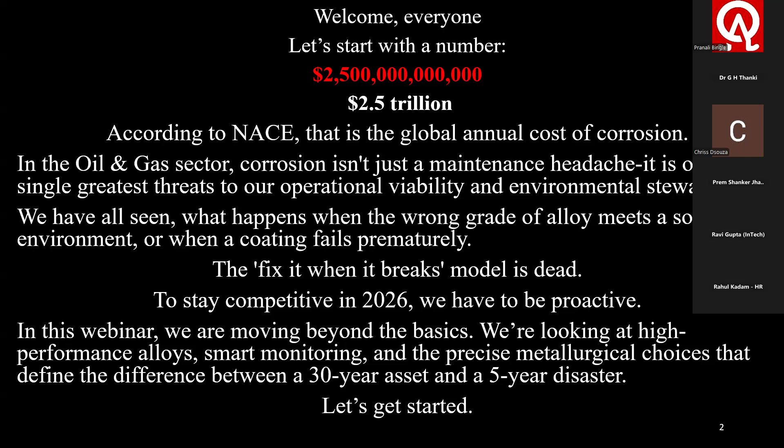Let us get started. You are the guardians of the infrastructure. By the end of the session, you will have a specific new strategy or piece of knowledge to apply to your current projects. Corrosion is not just a technical failure, it is a financial leak. Every millimeter of wall loss we prevent is a direct contribution to the company's bottom line and our ESG commitments.

As we push into more sour and ultra deep environments, the margin for error in our material selection has shrunk to near zero. We are no longer just choosing metals, we are engineering survival. We have all seen a stress corrosion crack that looked like a lightning bolt through a pipe.

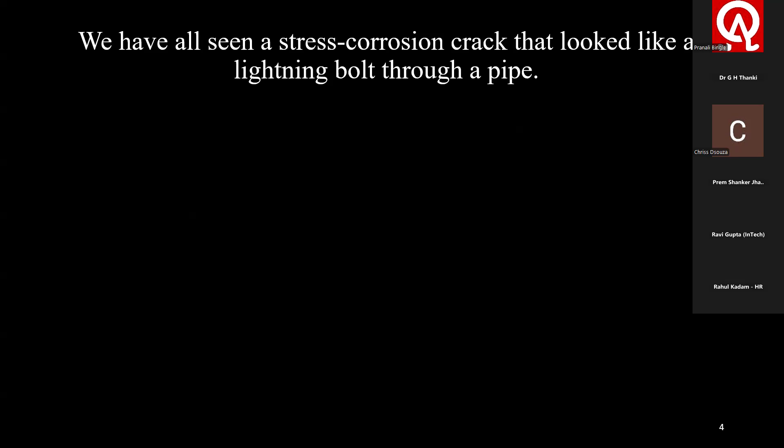Let us go through a few slides which will make things a little easier as I move forward with various slides which I am going to share with you. For example, this one - you have seen this stress corrosion crack on a pipe. Very disastrous path. Okay, next one is showing the corrosion, showing the tension and magnified details.

This is a micro crack like this - microscopic piece becoming a stress concentration. You see, the picture tells me a lot. Tensile stress - you can see localized corrosion pits under tensile stress. Leakage starts. In the magnified form, it shows the corrosion pits and micro cracks.

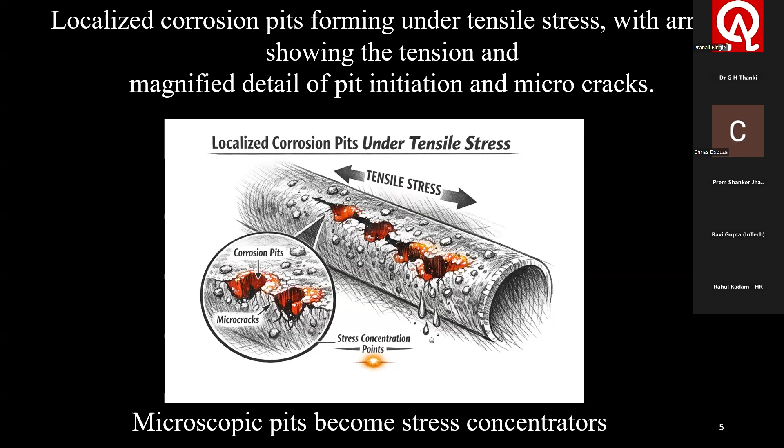These are step-by-step pictures I'm showing you how dangerous this corrosion can become in our oil and gas industries. Crack propagation, the fishbone pattern. Left-hand side shows the main crack, branching cracks, and spreading like a lightning bolt. This advanced one has to be good.

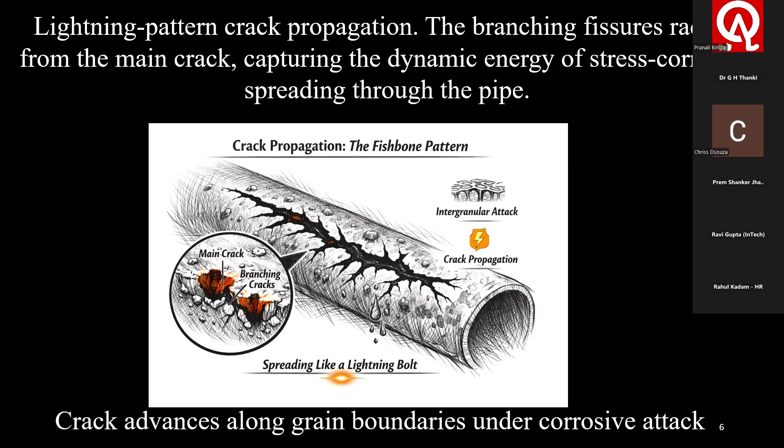And these arrows clearly mark the intergranular attack zones where corrosion follows grain boundaries. The inset magnified view reveals the crystalline fracture path, making the atomic level damage visual. You can see the crystalline path of corrosion.

This particular slide speaks volumes about how it happens. The fractography reveals the signature of stress corrosion cracking. I'm just touching one important point - this happens in a big way when sulfur is present in the oil.

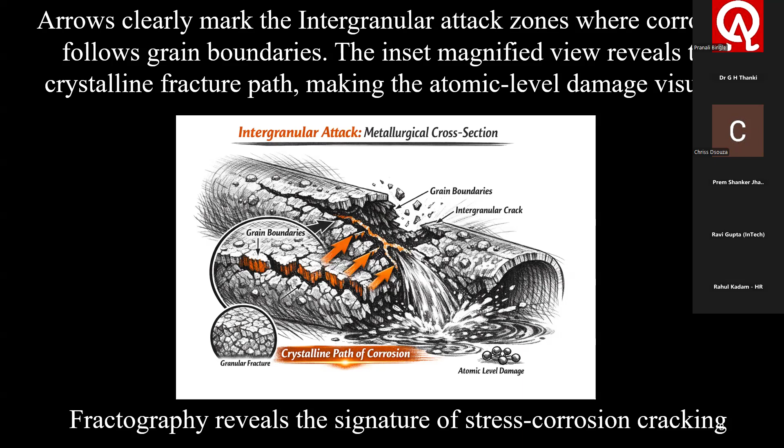This is a message which I want to pass through this webinar to all your people, those who are interested to learn and practice in their own day-to-day life. The sequence now tells us a complete forensic and motivational story, from pit initiation to rupture, culminating in vigilance as the ultimate protection.

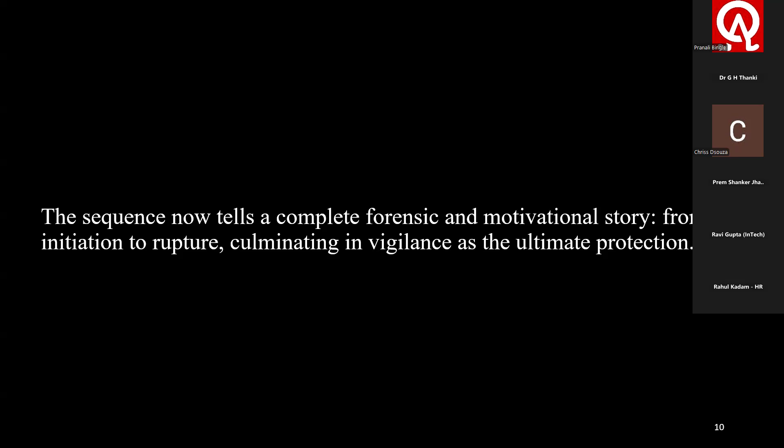Those are not just failures, they are signatures of a metallurgical mismatch. Today, we learn how to read these signatures before they write a check we can't cash.

In the oil and gas industries, corrosion is not merely a maintenance challenge, it is a critical safety, economic, and environmental concern. Managing it requires a sophisticated understanding of metallurgy, environmental chemistry, and material science. So I try to club all three together - metallurgy, environmental chemistry, and material science. A single one cannot give you the total foundation to control corrosion.

The industry's approach to corrosion mitigation relies on a hierarchy of defenses: material selection, that is metallurgy; environmental modification through inhibitors, water treatment; and surface protection - coatings and cathodic protection. First, the core corrosion mechanism - let us understand that. Before selecting materials, engineers must characterize the threat environment. The presence of water is the catalyst for nearly all corrosion in oil and gas.

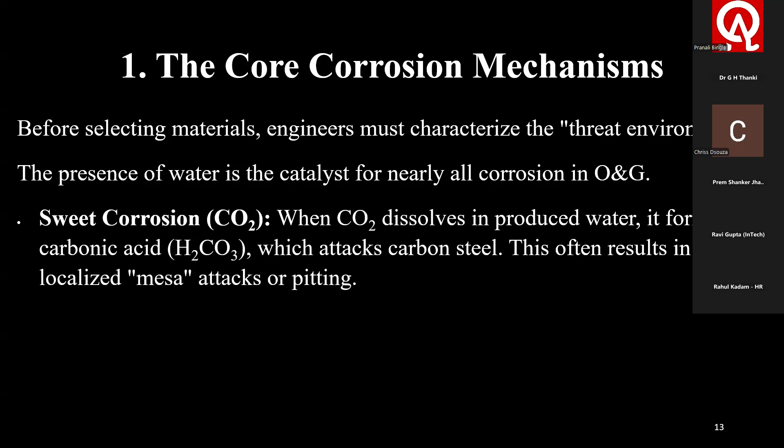Sweet corrosion means CO2, carbon dioxide, dissolves in produced water and forms carbonic acid, known as H2CO3, which attacks carbon steel. This often results in localized mesa attacks or pitting. This is the reaction that takes place.

Sour gas H2S, hydrogen sulfide, is highly toxic and leads to sulfide stress cracking and hydrogen induced cracking. Even trace amounts of H2S can cause sudden brittle failure in high strength steels.

Microbiologically influenced corrosion, MIC, commonly called MIC, involves sulfate reducing bacteria that thrive in stagnant zones or under deposits, producing hydrogen sulfide locally and accelerating pitting corrosion.

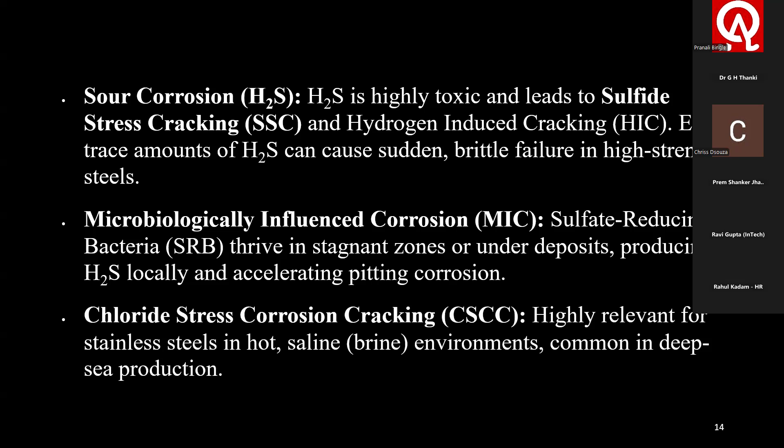Then comes chloride stress corrosion cracking, highly relevant for stainless steels in hot, saline environments, common in deep sea production. Let us see the metallurgical solution, the hierarchy of resistance.

Let us understand one by one. Material selection is a primary line of defense. Engineers choose metals based on their resistance profile versus cost and mechanical requirements of the application.

First, let us see carbon and low alloy steels, the workhorse of the industry for onshore pipelines and well casing, where the environment is non-corrosive or can be easily treated.

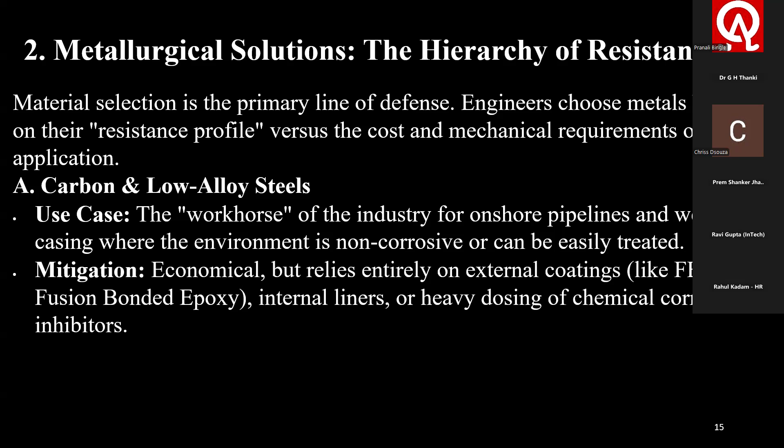How would you mitigate? Economical, but relies entirely on external coatings like fusion bonded epoxy, internal liners, or heavy dosing of chemical corrosion inhibitors. Metallurgical limitations include high susceptibility to H2S cracking. Therefore, specific...

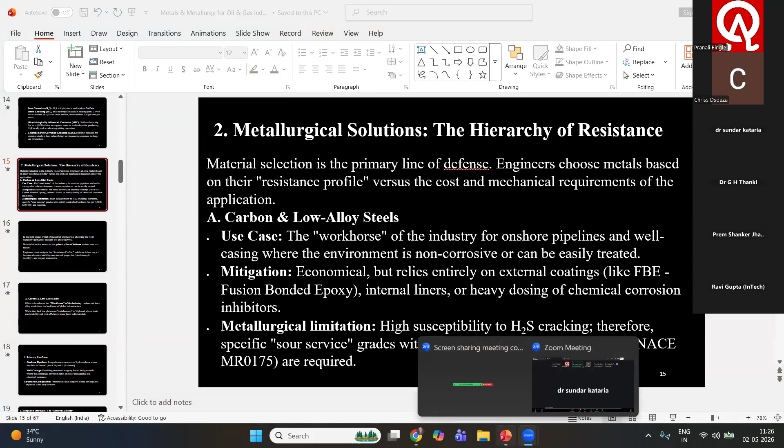Sir, your screen is not visible. What happened? Is it visible now? Okay, first let us see carbon and low alloy steels. Dr. Thanki, can you go back five minutes, because there was no audio and the slides were also not visible. If we go back to slide 17, I will go to 15 or 14. Okay, thank you.

Okay, let us go with slide number 17, carbon and low alloy steels.

Often referred to as the workhorse of industry, carbon and low alloy steels form the backbone of global infrastructure. While they lack the glamorous stainlessness of high-end alloys, their predictability and cost efficiency make them indispensable.

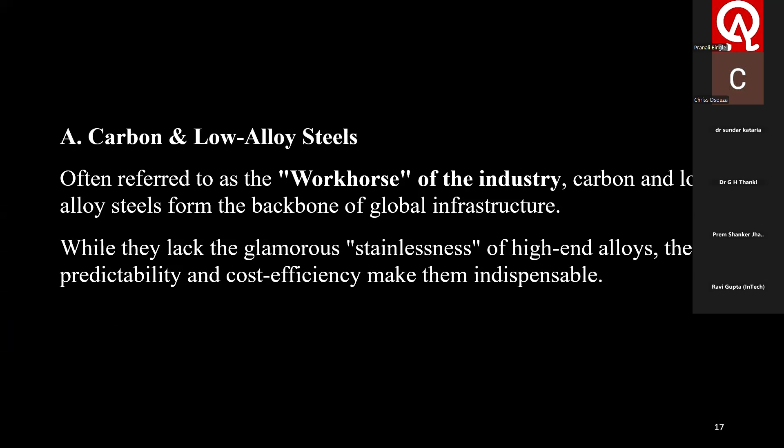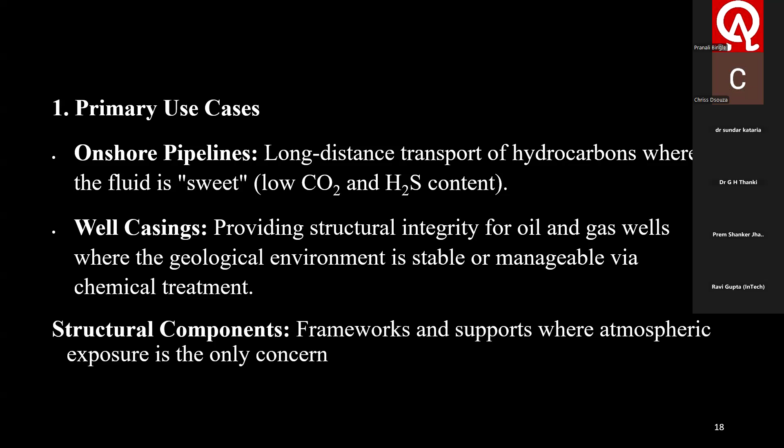Primary use cases: onshore pipelines for long-distance transport of hydrocarbons where the fluid is sweet, meaning low CO2 and H2S content; well casings providing structural integrity where the geological environment is stable or manageable via chemical treatment; and structural components, frameworks and supports where atmospheric exposure is the only concern.

So now the mitigation strategies, the external defense. Because carbon steel lacks innate corrosion resistance, it relies on a system of protection rather than its own chemistry.

External coatings, fusion bonded epoxy, act as a physical barrier. It is a thermoset polymer applied to heated pipes, creating a robust shield against soil-borne moisture and oxygen.

For internal liners, in more aggressive environments, plastic or cement liners prevent the produced fluids from touching the steel. And chemical corrosion inhibitors, CCIs, we see next.

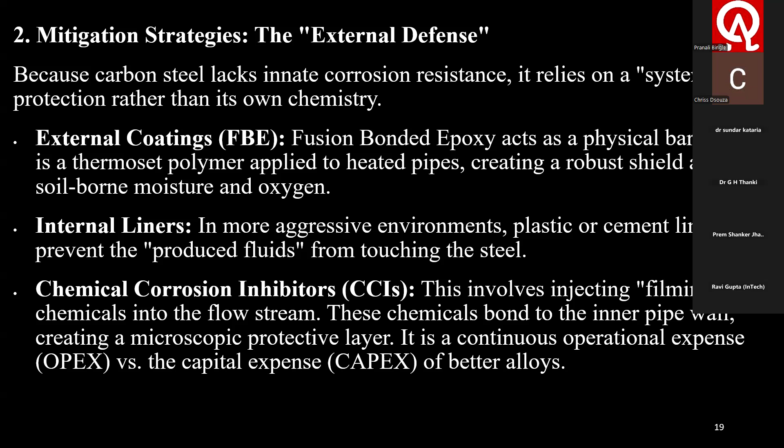This involves injecting filming chemicals into the flow stream. These chemicals bond to the inner pipe wall, creating a microscopic protective layer. It is a continuous operational expense, OPEX, versus the capital expense, CAPEX, of better alloys. There is a difference between OPEX and CAPEX.

Metallurgical limitation and sour service: the greatest weakness of standard carbon steel is its vulnerability to hydrogen sulfide, a phenomenon known as sour service. What is the chemistry of failure?

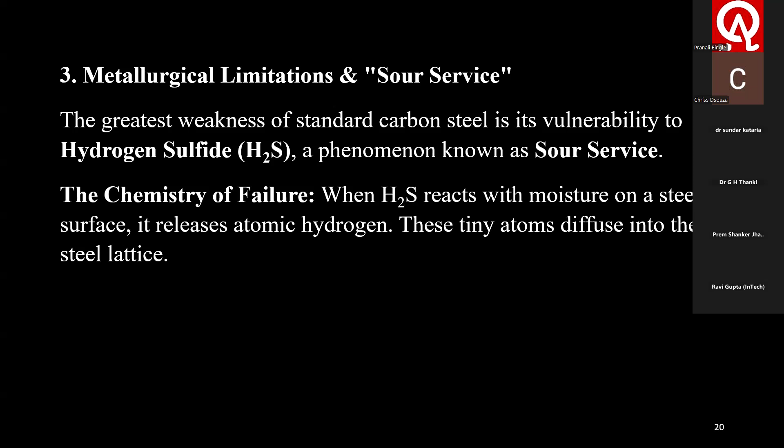When hydrogen sulfide reacts with moisture on a steel surface, it releases atomic hydrogen, and these tiny atoms diffuse into the steel lattice. If the steel is too hard or contains impurities, hydrogen collects at trap sites, creating internal pressure that leads to sulfide stress cracking or hydrogen-induced cracking, as shown here.

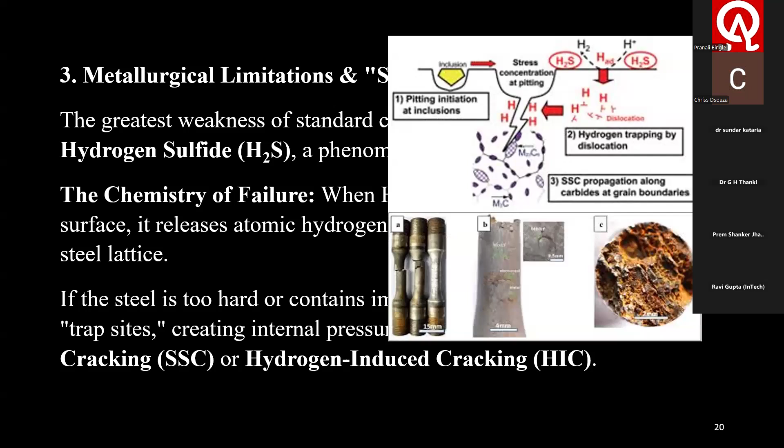Sulfide stress cracking, then comes another one, hydrogen-induced cracking. And this shows the manifestation of how it looks on the surface when hydrogen-induced cracking takes place.

To combat this, engineers utilize specialized sour service grades governed by the NACE MR0175 or ISO 15156 standards. Hardness control is generally limited to 22 HRC, meaning Rockwell hardness C. Harder steels are more brittle and prone to cracking under hydrogen embrittlement.

Cleanliness involves reducing sulfur and phosphorus levels during the melting process to eliminate inclusion sites where hydrogen bubbles can form. Heat treatment requires precise quenching and tempering to ensure a uniform microstructure, typically fine-grained tempered martensite or ferrite pearlite.

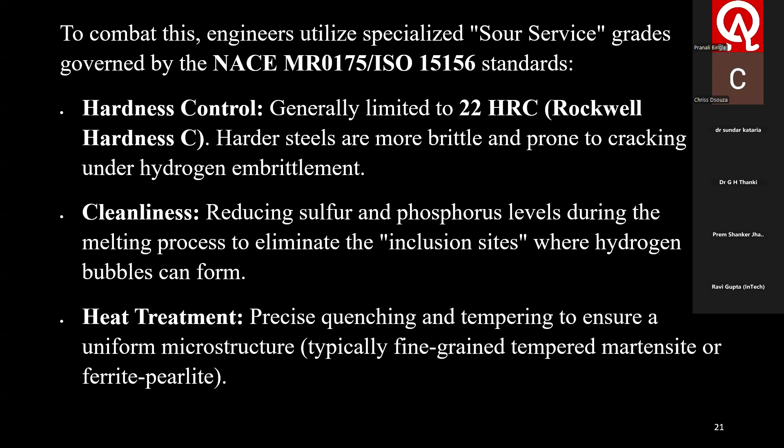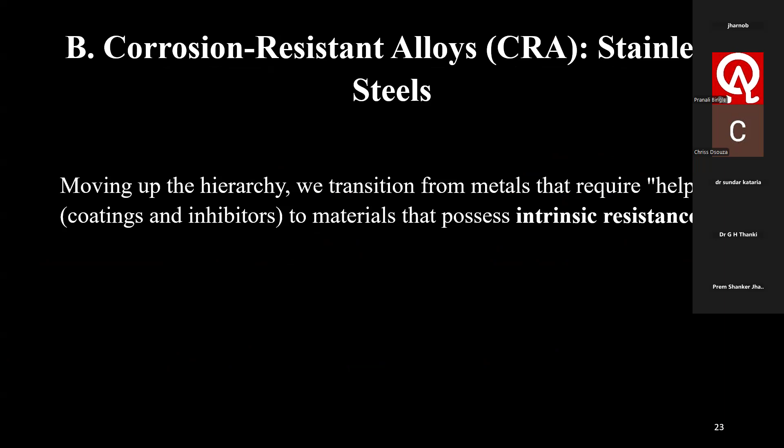Corrosion-resistant alloys, stainless steel. Moving up the hierarchy, we transition from metals that require help, meaning coatings and inhibitors, to materials that possess intrinsic resistance. Stainless steels are defined by a minimum chromium content of 10.5%, which reacts with oxygen to form a self-healing microscopic passive layer of chromium oxide.

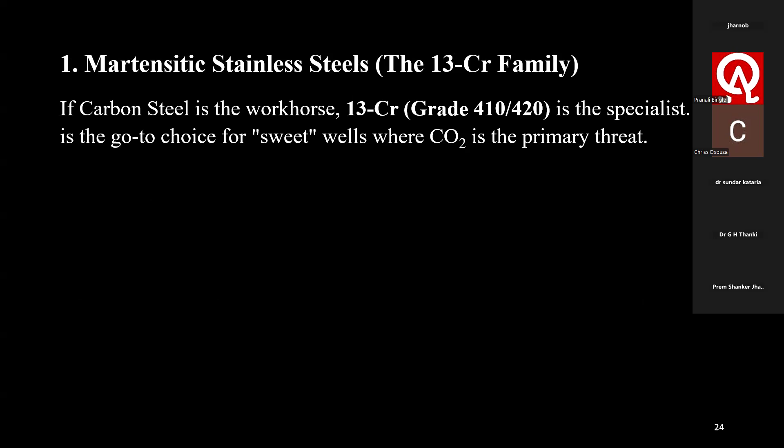Martensitic stainless steel, that is the 13 CR family. If carbon steel is the workhorse, 13 chrome is the specialist. It is the go-to choice for sweet wells where CO2 is the primary threat. The advantage: high strength to weight ratio and excellent resistance to carbon dioxide corrosion without the need for continuous chemical inhibition. The trade-off: poor weldability.

These are typically used for downhole tubulars, meaning production tubing, rather than long distance welded pipelines. What are the limitations? Highly sensitive to chlorides and high temperatures. In hot, salty environments, the passive layer breaks down, leading to rapid pitting.

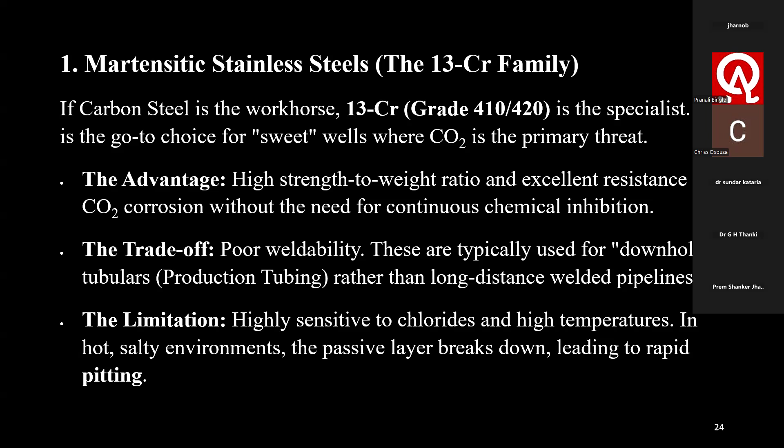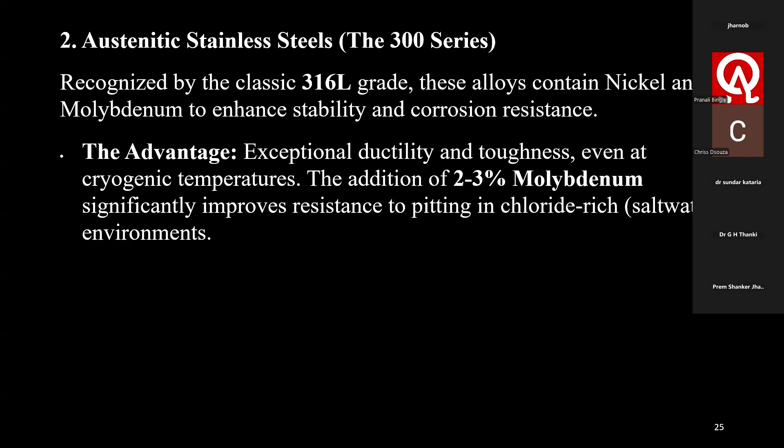Next is the austenitic stainless steel, very fondly known as the 300 series, recognized by the classic 316L grade. These alloys contain nickel and molybdenum to enhance stability and corrosion resistance. The advantage: exceptional ductility and toughness, even at cryogenic temperatures. The addition of 2 to 3% molybdenum significantly improves resistance to pitting in chloride-rich, meaning saltwater, environments.

But what is the critical weakness? Chloride stress corrosion cracking. In hot, chloride-rich environments, these steels can fail catastrophically and suddenly through fine branching cracks, even if the metal looks shiny and new on the surface.

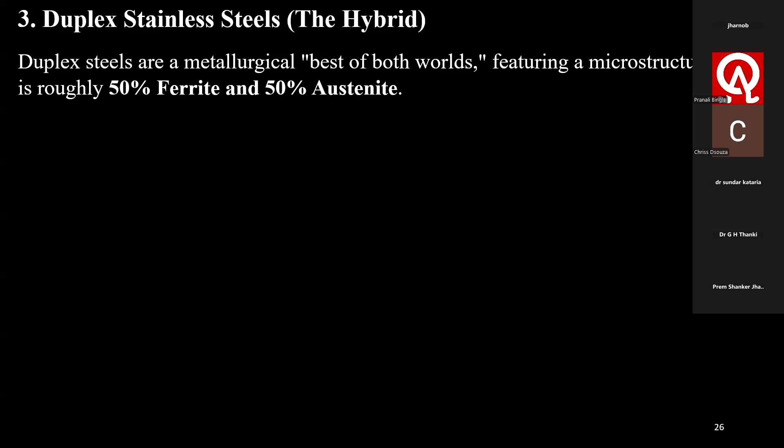Next comes the duplex stainless steel, which we call a hybrid. Duplex steels are a metallurgical best of both worlds, featuring a microstructure that is roughly 50% ferrite and 50% austenite. Mechanical superiority: roughly twice the yield strength of standard austenitic steels, allowing thinner walls and lighter structures. That means, from the cost point of view, it also wins the race.

Its corrosion profile is what? Exceptional resistance to stress corrosion cracking and pitting. They are the standard for subsea manifolds and flow lines where the internal fluid is aggressive and the external environment is seawater. The PREN number.

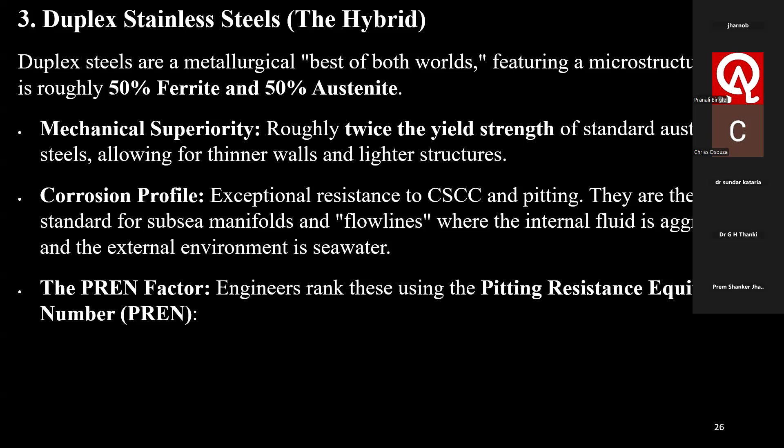Engineers rank these using the pitting resistance equivalent number, PREN. This is what you call pitting resistance equivalent: percentage chromium plus 3.3 times molybdenum percentage and tungsten percentage, plus 16 times nitrogen. If you calculate this and the PREN number comes out, let's pick some values, say 30, 40, 45, like that.

We'll see in the following lecture. A PREN of more than 40 classifies a material as super duplex, capable of surviving the most punishing marine conditions.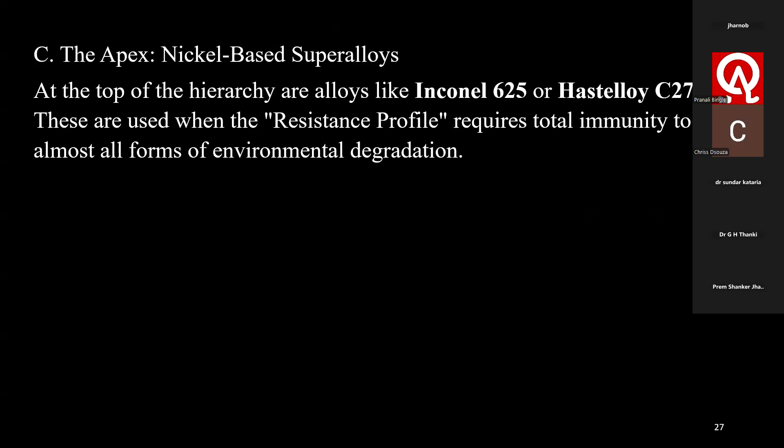The apex: nickel-based superalloys. At the top of the hierarchy are alloys like Inconel 625 or Hastelloy C276. These are used when the resistance profile requires total immunity to almost all forms of environmental degradation. Use case: high pressure, high temperature, HPHT wells, or components handling acid gases, high H2S, and carbon dioxide.

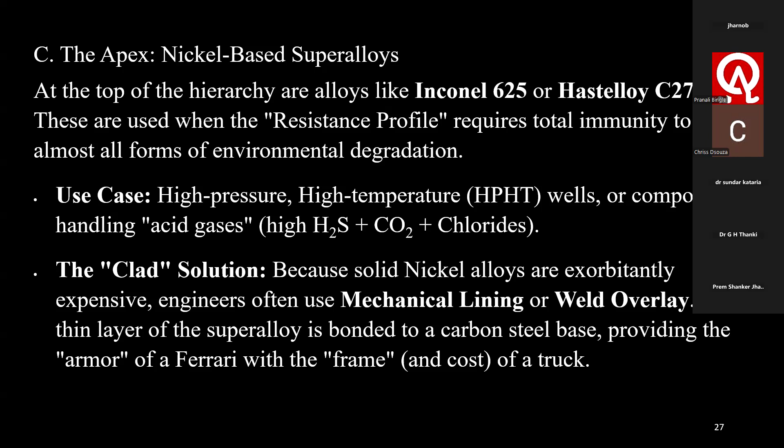The clad solution: because solid nickel alloys are exorbitantly expensive, engineers often use mechanical lining or weld overlay. A thin layer of the superalloy is bonded to a carbon steel base, providing the armor of a Ferrari with the frame of a truck. I hope you understand this better now.

Let us see a comparison of cost performance. For carbon steel, if you take the cost multiplier as 1, for example, key threats are none, it needs help. Common applications are onshore trunk lines.

13 chromium stainless steel is 3 to 5 times costlier than carbon steel. Its key threat is carbon dioxide, sweet gas, and the main application is downhole tubing.

Duplex stainless steel is 8 to 12 times costlier than carbon steel. Its threat is chloride and high stress, which it will resist much more, and its common application is the subsea flowline.

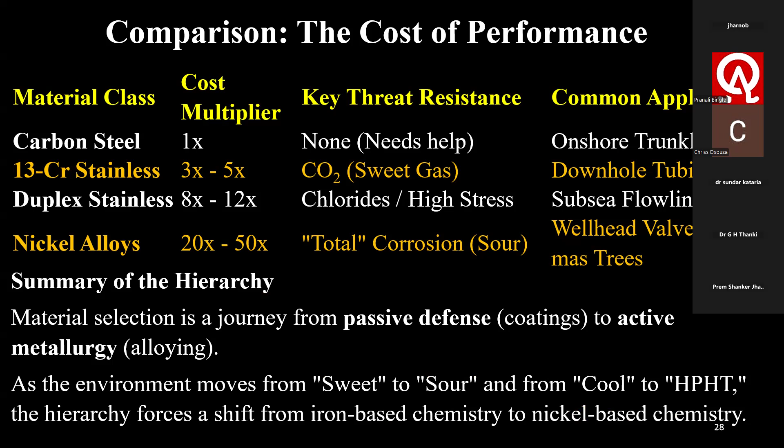Summary of the hierarchy: materials selection is a journey from passive defense, that is coatings, to active metallurgy, that is alloying. As the environment moves from sweet to sour and from cool to HPHT, the hierarchy progresses from carbon steel to duplex to nickel-based chemistry.

Corrosion resistant alloys, CRA. When the fluid is too aggressive, with high partial pressure carbon dioxide or H2S beyond what carbon steel can handle, we move to CRA. These alloys rely on a thin passive chromium oxide layer to stop corrosion.

This is just a brief overview I'm giving you. Materials include stainless steel, austenitic stainless steel, duplex, and super duplex. Let me show you the typical composition. Key characteristics: high strength, ductile, austenitic, with superior pitting resistance in the super duplex. The common application is wellhead to aggressive subsea production where super duplex is used.

Please have a look at this particular table. I will pause for a minute.

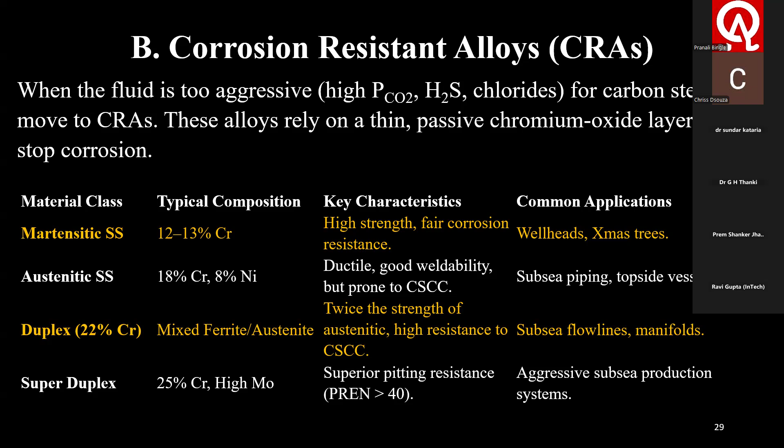Let us go ahead to high performance nickel alloys and titanium, for the most extreme HPHT, high pressure, high temperature, deepwater, or deep gas wells. Here I am talking about Inconel 625 and alloy 825. This provides immunity to almost all forms of localized corrosion and cracking. They are used for the most critical downhole completion components where failure would be catastrophic and impossible to repair.

Titanium alloys have exceptional strength to weight ratio. They are very much known for that strength to weight ratio. Along with immunity to corrosion stress cracking, titanium is used increasingly in offshore riser systems and subsea components to reduce structural weight.

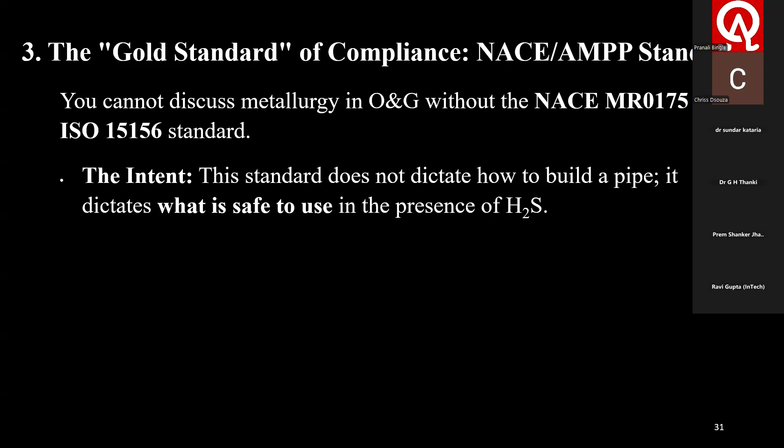Let us see the gold standard of compliance as per the NACE and AMPP standards. You cannot discuss metallurgy in oil and gas without the NACE MR0175 / ISO 15156 standard. What is the intent? This standard does not dictate how to build a pipe, it dictates what is safe to use in the presence of H2S. I think this intent is clear.

What is the mechanism? It defines limits for the hardness, usually measured in HRC, Rockwell C, of the metal. If a steel is too hard, it is susceptible to hydrogen embrittlement, as we know well. Engineers must ensure every weld, heat-affected zone, and base metal component complies with the hardness limits specified for the operating environment. It's a very important mechanism to be known to meet this intent.

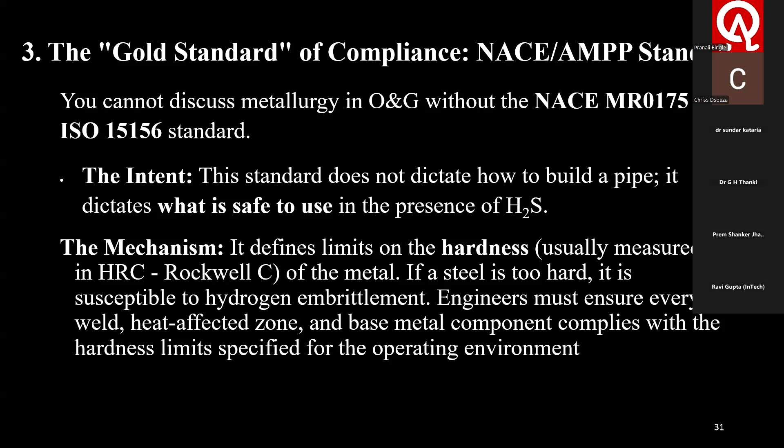Now let us discuss the holistic mitigation strategy. Metallurgy is only one part of the equation. A mature corrosion management program uses a multi-layer defense. My dear participants, forgive me, I'm not dealing only with metallurgy now, because if I talk only of metallurgy, the equation will never be over. I must have support from other corrosion management layers for the defense. Let us go into detail to form a holistic picture.

Chemical inhibition: continuous injection of film-forming amines for carbon steel pipelines. These chemicals adsorb onto the metal surface, creating a hydrophobic barrier that prevents the corrosive water phase from touching the steel.

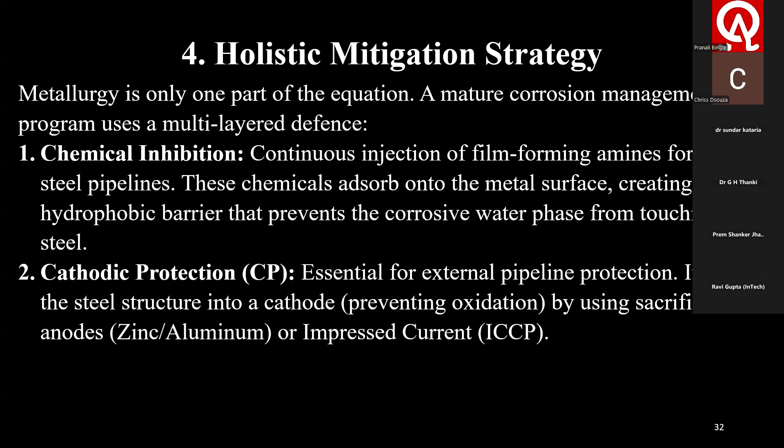Second comes cathodic protection, essential for external pipeline protection. It turns the steel structure into a cathode, preventing oxidation by using sacrificial anodes like zinc and aluminum, or impressed current cathodic protection, ICCP.

Water treatment: removing oxygen, the primary accelerator of corrosion, via vacuum deaerators or chemical oxygen scavengers before water is pumped into injection wells. These three points are to be kept in mind to understand the holistic mitigation strategy.

Designing for the oil and gas industry requires balancing the total cost of ownership, capital expenditure on expensive alloys, versus operating expenditure on corrosion inhibitors and inspection, against the risk of failure.

I would like to repeat the same paragraph, keep it in your mind: designing for the oil and gas industry requires balancing the total cost of ownership against the risk of failure.

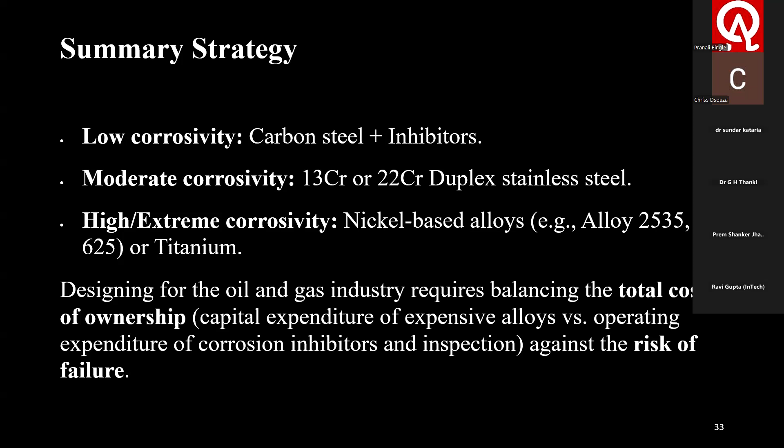Material selection for high pressure, high temperature subsea environments. In HPHT subsea environments, the corrosion landscape shifts from standard kinetics to a regime dominated by aggressive synergisms. When temperature exceeds 150 degrees centigrade and pressure rises significantly, traditional material boundaries collapse, requiring a transition from standard stainless steel to advanced nickel-based superalloys.

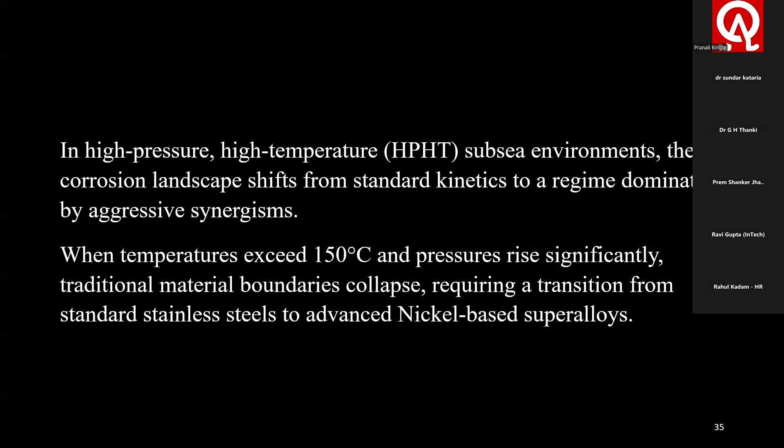Metallurgy in HPHT subsea environments. The core challenge in HPHT is that high thermal energy accelerates cathodic and anodic reaction rates, while high pressure increases the solubility of gases like carbon dioxide and hydrogen sulfide, directly impacting the partial pressure and the resulting corrosivity.

Now let us see the synergy of failure mechanisms. At temperatures more than 120 degrees centigrade, common alloys like 13 chrome or 22 chrome to duplex face a threshold where the passive chromium oxide layer becomes prone to breakdown in the presence of chlorides.

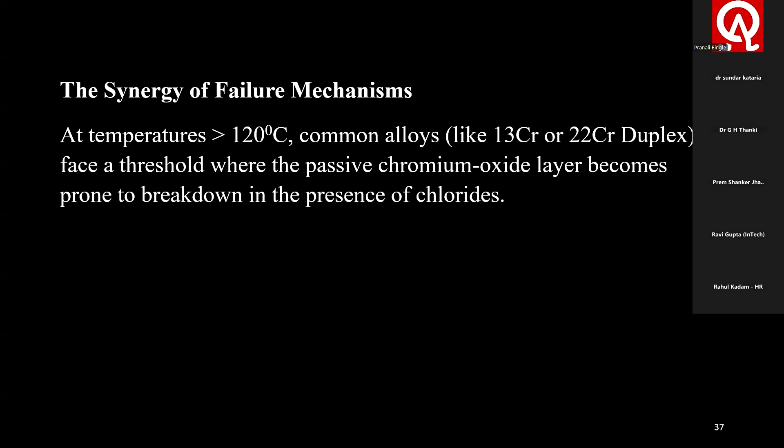Here let us see HE and SCC. In sour HPHT environments, the kinetics of hydrogen evolution and diffusion into the metal lattice increase exponentially. The temperature sensitivity of CRAs, 13 chromium and super 13 chromium, often limits them to lower temperatures due to the risk of sulfide stress cracking and chloride-induced pitting.

22 chromium to 25 chromium duplex is prone to phase instability, that means formation of brittle sigma phases if not strictly controlled during welding and heat treatment, which exacerbates corrosion in HPHT services.

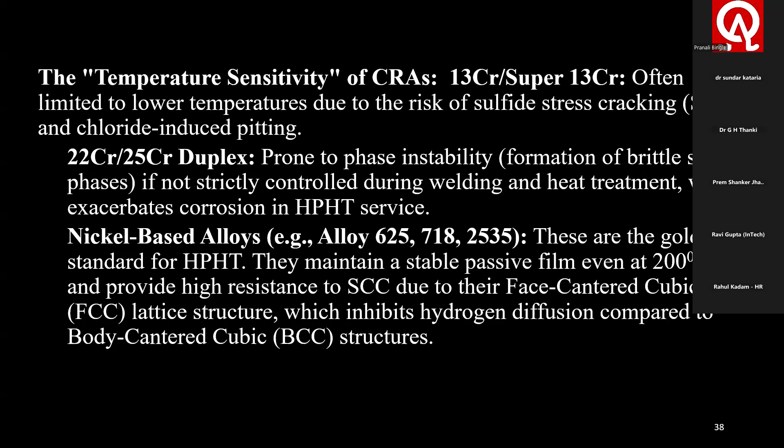If you talk about nickel-based alloys, say 625, 718, and 2535, these are the gold standard for HPHT. They maintain a stable passive film even at 200 degrees centigrade plus and provide higher resistance to stress corrosion cracking due to their face-centered cubic lattice structure, which inhibits hydrogen diffusion compared to body-centered cubic structure.

Now let us select the protocol. When specifying materials for HPHT, the focus must shift to pitting resistance equivalent number, that is PREN, and the critical pitting temperature, CPT. For subsea conditions, one must calculate the alloy resistance based on the specific chloride concentration and partial pressure of sour gases.

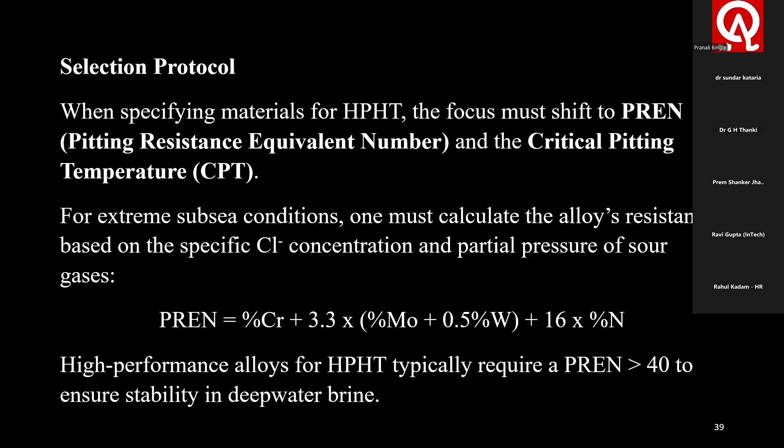I am again referring back to that PREN equation. High performance alloys for HPHT typically require a PREN more than 40 to ensure stability in deep water brine.

Let us see the chemistry of corrosion inhibitor selection. Corrosion inhibitors in the oil field are essentially surfactants that modify the metal-liquid interface. Selecting the correct chemical for an HPHT environment is a balancing act between thermal stability and the ability to form a persistent hydrophobic barrier that does not allow water to touch the substrate.

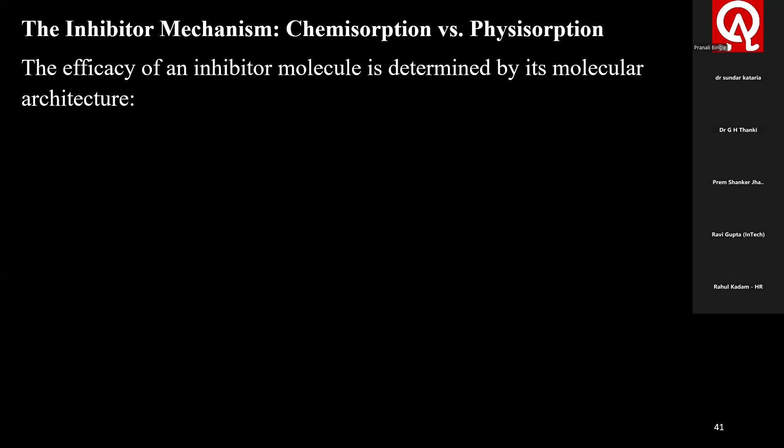The inhibitor mechanism—chemisorption versus physisorption. The efficacy of an inhibitor molecule is determined by its molecular architecture. The polar head group, typically an amine, pyridine, or phosphonate group, anchors the molecule to the metal surface. Chemisorption provides a stronger, more durable bond by sharing electrons between the head group and the metal, which is essential for HPHT environments where thermal energy would otherwise strip the inhibitor from the surface.

This would render the inhibitor ineffective. The hydrophobic tail, a hydrocarbon chain usually C12 to C18, extends into the fluid phase and creates a hydrophobic wall, preventing the corrosive aqueous phase of H2O, CO2, and chloride from reaching the metal surface.

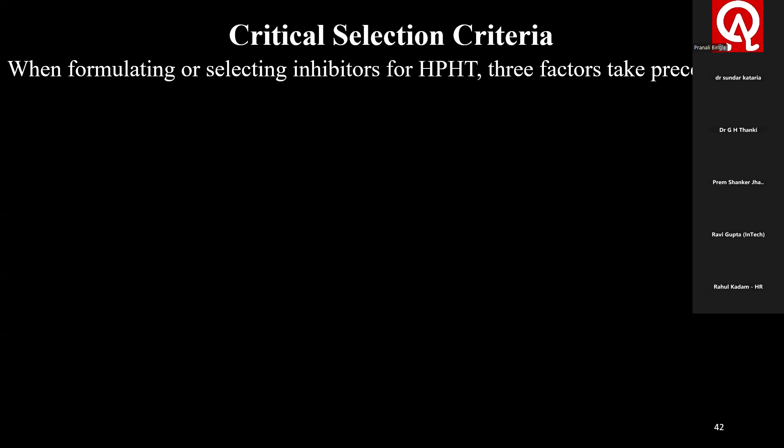Now let us see the critical selection criteria. When formulating or selecting inhibitors for HPHT, three factors take precedence. First, thermal degradation: many long chain amines or imidazolines degrade at high temperatures, breaking the bond between the head and the tail. Formulators must utilize thermally stable heterocyclic structures or specialized synergistic blends that maintain integrity above 150 degrees centigrade.

Second comes the partitioning coefficient. An inhibitor must partition preferentially into the oil phase if oil soluble, or the water phase if water soluble, depending on the production flow. In high water cut wells, water soluble, film-forming amines are required.

Last is emulsion tendency. One must evaluate the oil-water separation capability. An effective inhibitor must not create tight emulsions, meaning stable rag layers in separators, which would otherwise cause massive downstream processing issues.

So these are the critical areas in the selection. I have given the heading as critical selection criteria: thermal degradation, partitioning coefficient, and emulsion tendency. I hope you will appreciate this matter.

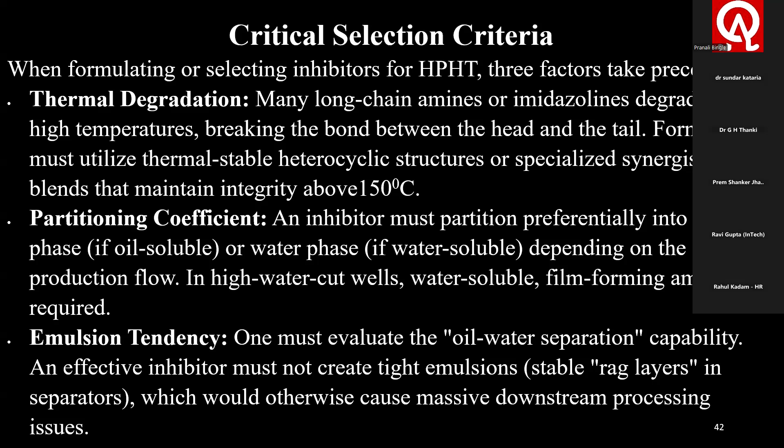Optimization for deep water. For long distance subsea tie-backs, the challenge is film persistence. The inhibitor is often injected at the wellhead and must remain active over kilometers of flow line. It's a really big challenge, and I would love to repeat it again.

For long distance subsea tie-backs, the challenge is film persistence. The inhibitor is often injected at the wellhead and must remain active over kilometers of flow line. We look for batch treatment capabilities, where the inhibitor can form a tenacious, durable film that survives long after the chemical injection has ceased or fluctuated. It's a really big challenge, sir—that's the batch treatment I'm talking about.

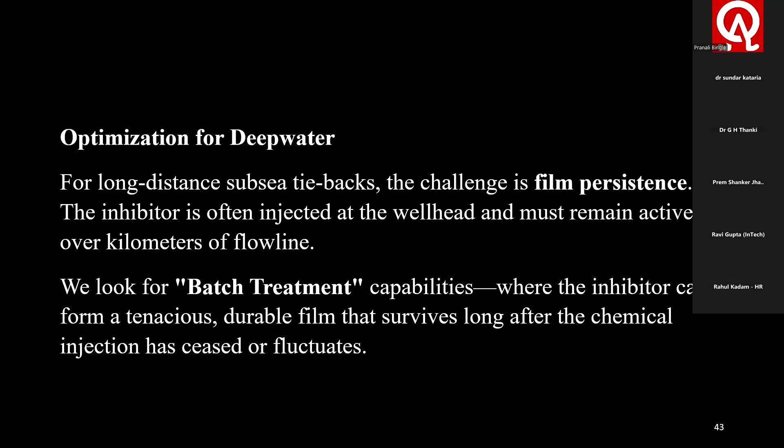Strategic corrosion management integrates metallurgy, life cycle cost, and safety. To optimize asset performance in HPHT environments, one must move beyond mere material selection and adopt a holistic life cycle costing and inherently safer design framework.

Inherently safer design, ISD, is a really very interesting study. If interested, I can give an independent talk on inherently safer design and life cycle costing to more people, maybe for 1.5 hours or so. If required, I'll be available to you.

The following synthesis aligns metallurgical performance with economic and safety realities, specifically tailored for capital projects within the Indian industrial landscape.

The economic link: metallurgy, LCC, and ROI. In the Indian market, project stakeholders often prioritize initial capex. However, for HPHT assets, the corrosion warrior approach demonstrates that investing in higher grade metallurgy, CRA, often results in superior net present value (NPV) and return on investment (ROI) when OPEX, that means operation expenditure such as chemical injection, monitoring, and inspection, is factored in over 15 plus years.

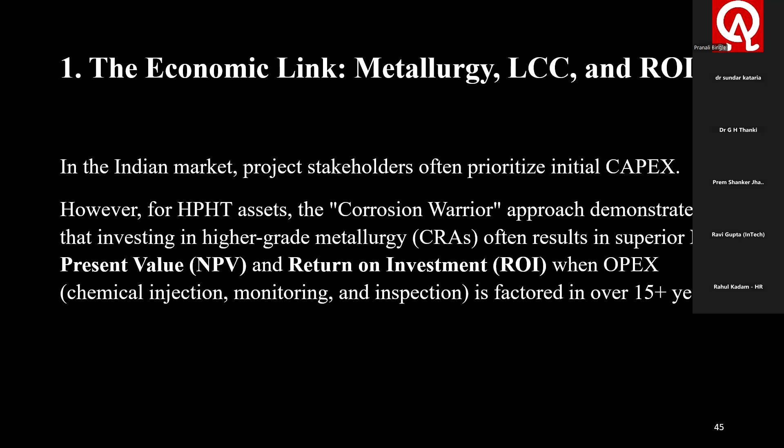Duplex stainless steel is moderate, 1.8 times cost. OPEX is low with minimum dosing. Life cycle risk is low. A standard choice for offshore and subsea applications.

Safety integration: inherently safer design. In corrosion management, ISD dictates that we eliminate the hazard at the design stage rather than relying on active control systems like chemical inhibitors, which can fail.

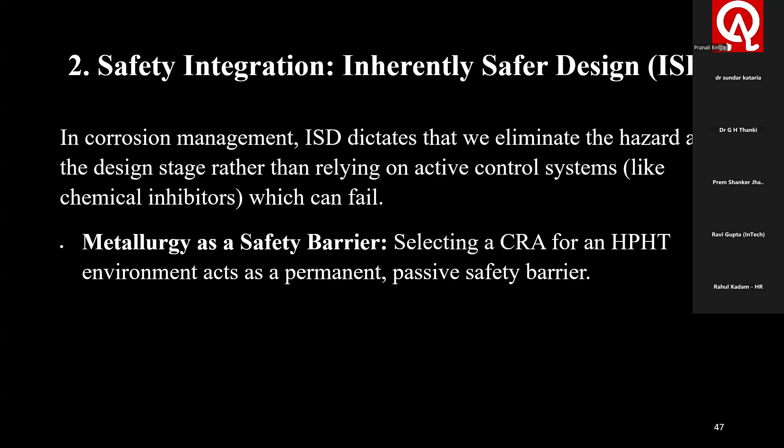Metallurgy is a safety barrier. Selecting a CRA for the HPHT environment acts as a permanent passive safety barrier. It eliminates the human factor, the risk of chemical pump failure, inhibitor shortage, or improper dosing concentration, which are common failure points in our Indian industrial operations.

With a little sorrow, I tell you, from my own set of experiences, inhibitor dosage or inhibitor shortage had caused big problems in some industries where the human factor had entered in. Now, I will not dwell on the human factor - being human, we know our negative points in our mind.

Corrosion related containment loss. Under the principle of ISD, we minimize the frequency of inspection and the complexity of corrosion monitoring infrastructure by using materials that resist cracking by design.

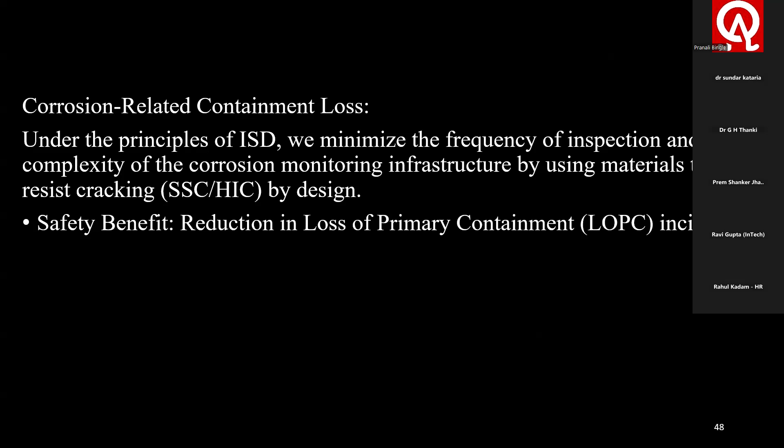Safety benefit: reduction in loss of primary containment (LOPC) incidents. The regulatory environment ensures strict adherence to NACE MR 0175 and ISO 15156, providing a defensible engineering position in safety audits.

Let us see the tangible benefits and ROI drivers. When presenting these strategies to management, focus on the following tangible metrics if you want to get through and get the green signal. These are internal matters to discuss among engineers before they reach the board.

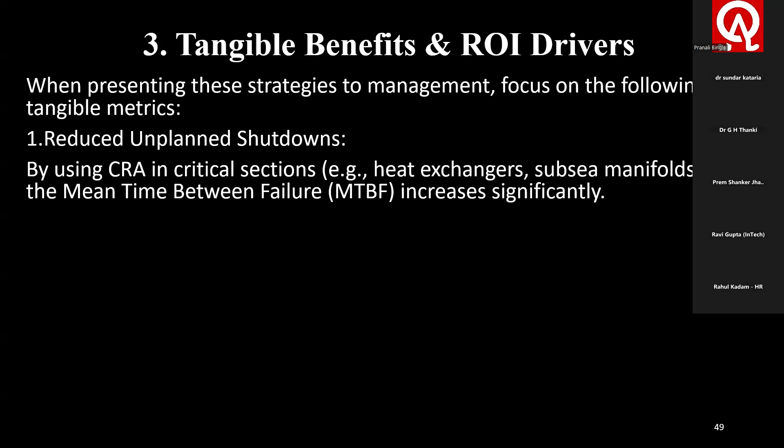Reduce unplanned shutdowns by using CRA in critical sections like heat exchangers, subsea manifolds. The mean time between failure, MTBF - a buzzword now for maintenance engineers - increases significantly. Benefit: avoiding just one unscheduled shutdown in an Indian refinery or chemical plant can save tens of crores in lost production.

Lower insurance premium. Asset integrity management, which is my buzzword now - since last few years I'm working only with asset integrity management programs - demonstrates that the use of high-grade, risk-adjusted materials often qualifies for a better insurance risk profile, so you pay a little less premium. In the long run, this driver will help you reach the board of directors to get the sanction.

Decrease inspection frequency. High integrity alloys require less frequent non-destructive testing and intelligent pigging, reducing OPEX related to specialized inspection, labor, and logistics.

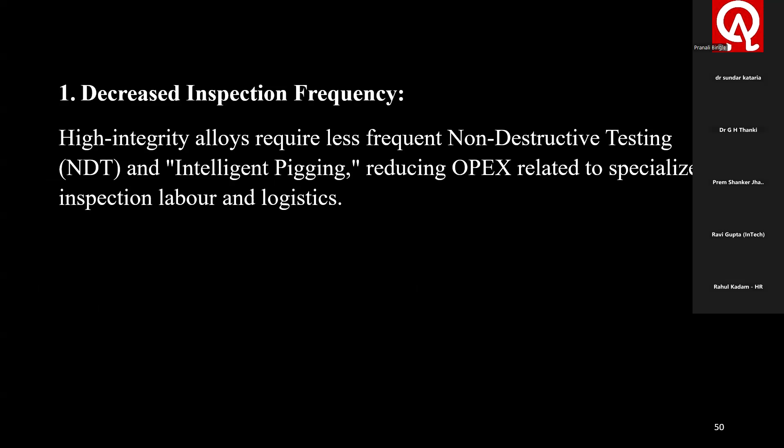Environmental compliance: minimizing chemical inhibitor usage reduces the toxic load in the produced water stream, lowering the capital and operating costs of the effluent treatment plant.

I am going to throw one webinar on effluent treatment plants soon. Corrosion plays an important role there. I'll make a note so that when it goes on air, this case will be covered - we have to wait for that.

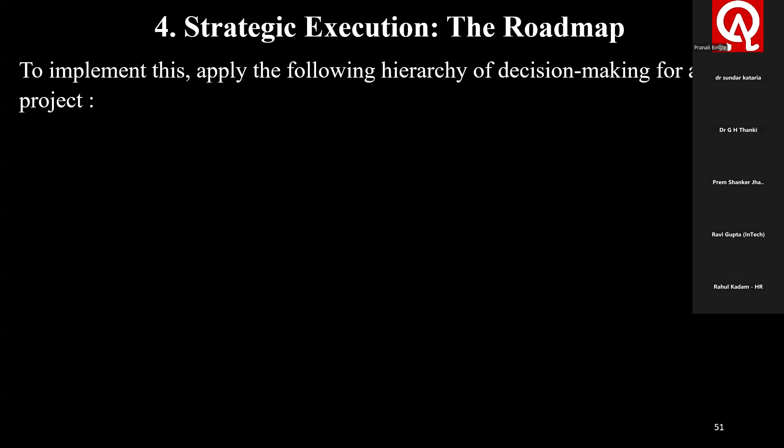To implement this, apply the following hierarchy of decision making for any new project: first, define the threat envelope.

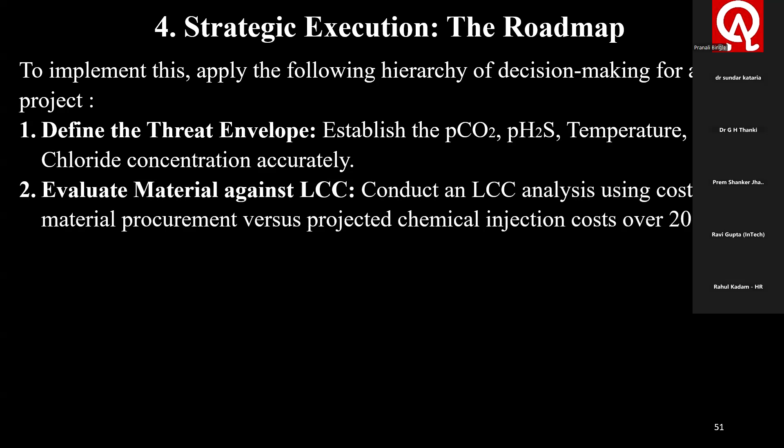Establish the partial carbon dioxide, partial hydrogen sulfide pressure, temperature, and chloride concentration accuracy. Evaluate material against life cycle cost. Conduct a life cycle cost analysis comparing material procurement cost versus projected chemical injection cost over 20 years. Apply passive protection, prioritizing higher metallurgy to remove reliance on active systems like inhibitors or cathodic protection, wherever the environmental severity justifies the capex.

Verifications: implement a robust NDT plan to validate that the selected metallurgy is performing according to the predicted corrosion rates. That means corrosion allowance management. I hope this matter is quite clear in your mind.

Define the threat envelope, evaluate material against LCC, apply passive protection, and verify all of this against the corrosion allowance. By shifting the culture from repair-and-replace, which is reactive, to design-for-integrity, which is proactive, you transform the corrosion function from a cost center into a value preservation strategy.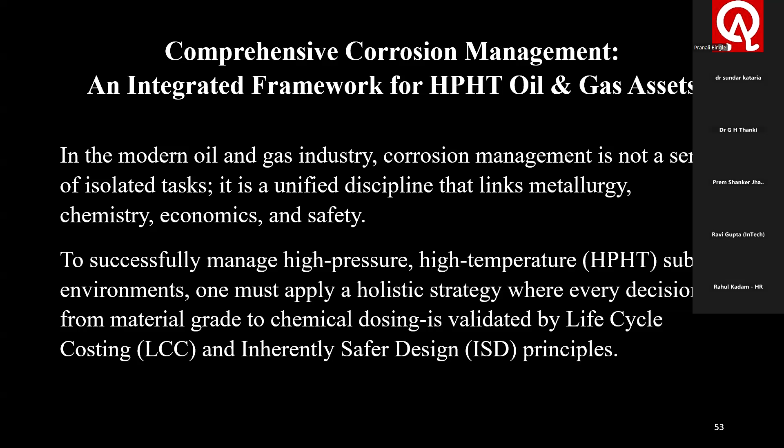To successfully manage high pressure, high temperature subsea environments, one must apply a holistic strategy where every decision from material grade to chemical dosing is validated by LCC and ISD principles, which I have been practicing for the last few years. And that's why I sometimes get a clap from the management. Yes, this is the way we should look into it.

Defining the threat envelope - the foundation. Before any engineering decision is made, we must define the threat envelope. In HPHT environments, the synergism of high thermal energy and pressure increases the solubility of gases like CO2 and H2S, directly accelerating corrosive reaction rates. The combination of more than 150 degrees centigrade temperatures and high partial pressures of CO2 and H2S renders traditional carbon steels inadequate, as they become susceptible to sulfide stress cracking and hydrogen-induced cracking.

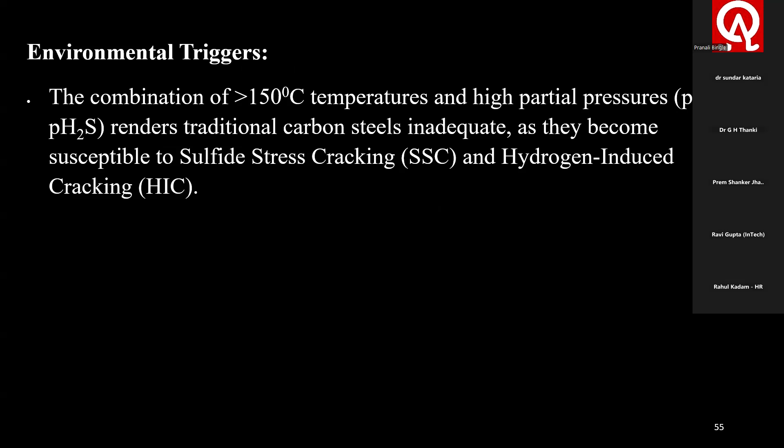The metallurgy response: our first line of defense is material selection. For HPHT, we move away from standard alloys to high-performance corrosion resistant alloys with a pitting resistance equivalent number of more than 40.

In this, what will you see is the hierarchy? 13 chromium to super 13 chromium - suitable for moderate temperature, limited by SSC risk. You have to be careful, the SSC risk is definitely prevalent there.

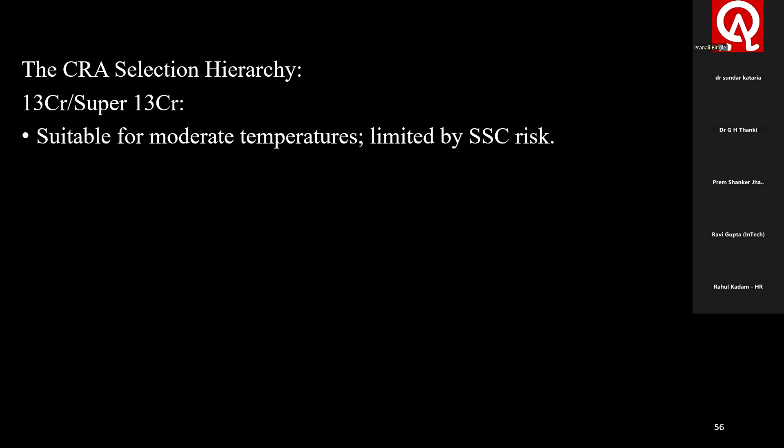Duplex: high strength and chloride resistance, but requires strict control of the microstructure to avoid brittle sigma phase formation. So welding plays a very important role. I have seen 2205, 2507, super duplex used industrially. I've seen in some industries where the welder, casually, without getting any advice from the supplier, hits the surface - because they feel the moisture should be removed, so they hit the torch on the surface and start welding. And they make this material, which is as costly as gold, degrade within a few months in the structure. So this is very important - high strength and chloride resistance, but requiring strict control of the microstructure to avoid brittle sigma phase formation.

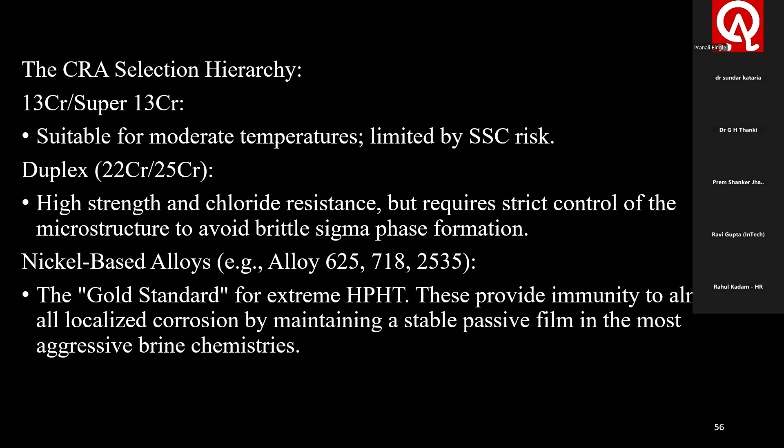Nickel based alloys - alloy 625, 718, 2535 - the gold standard for extreme HPHT. These provide immunity to almost all localized corrosion by maintaining a stable passive film in the most aggressive brine chemistries.

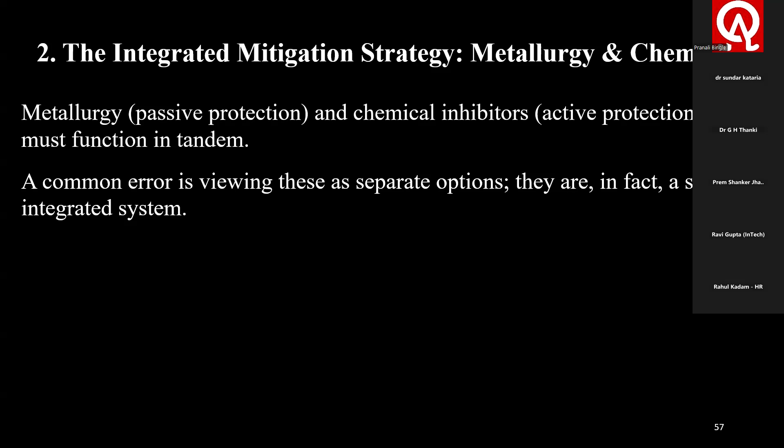The integrated mitigation strategy: metallurgy and chemistry. Metallurgy, which is passive protection, and chemical inhibitors, which are active protection, must function in tandem. A common error is viewing these as separate options - they are, in fact, a single integrated system. Passive protection, that is metallurgy utilizing CRA components, provides a permanent, low maintenance barrier. This directly satisfies inherently safer design principles, as it reduces reliance on active chemical injection systems that are prone to mechanical failure.

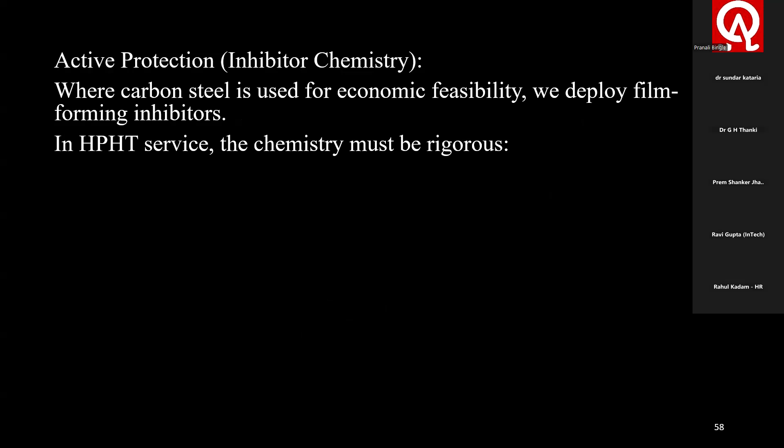Active protection, like inhibitor chemistry: when carbon steel is used for economic feasibility, we deploy film forming inhibitors. In HPHT service, the chemistry must be rigorous. Thermal stability - as we've seen in the previous slides - the inhibitor must resist degradation at 150 degrees centigrade, not 1500 as I mistakenly said earlier, I'm sorry for that error. We prioritize heterocyclic structures that maintain a strong chemisorbed bond with the metal surface.

Partitioning. The inhibitor is selected to partition effectively into the water phase, forming a hydrophobic barrier that prevents the corrosive brine from reaching the steel.

Economic alignment: LCC, ROI, and market realities. In the industrial context, procurement decisions are often constrained by initial capex. However, to maximize return on assets and minimize operational risk, procurement strategy must shift to life cycle costing. The LCC calculator is a decision-making engine.

CapEx versus OpEx, the trade-off. Investing in a CRA, for example nickel alloys, results in higher initial expenditure in rupees, but dramatically reduces the OpEx associated with chemical dosing, monitoring, and frequent inspection. For a typical facility, avoiding one unscheduled shutdown, often valued in tens of crores of rupees, is the primary driver for high-grade material selection.

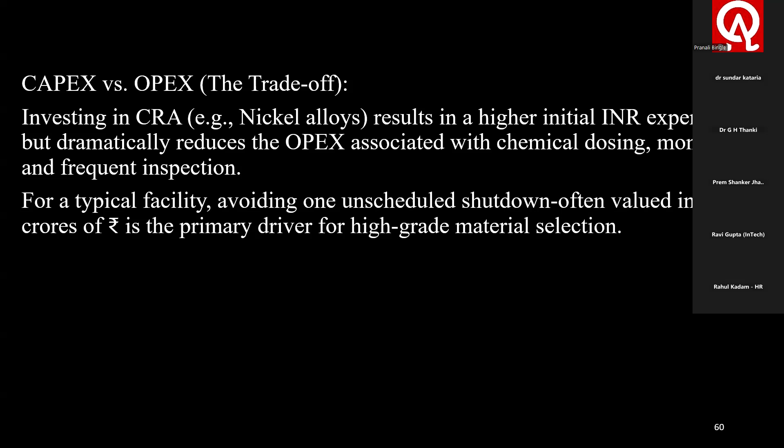So let us say risk cost mitigation. High-grade alloys require less frequent NDT and intelligent pigging. Enhanced material integrity lowers insurance risk profiles and reduces the environmental liability associated with leak-prone pipelines.

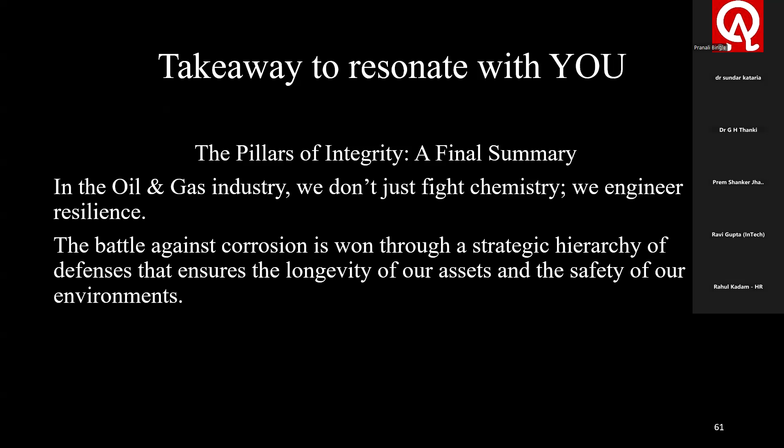So we are now ending my presentation. Let us take away something to resonate with you. What are the pillars of integrity? A final summary: in the oil and gas industry, we don't just fight chemistry, we engineer resilience. The battle against corrosion is won through a strategic hierarchy of defenses that ensures the longevity of our assets and the safety of our environments.

The first line of defense is material selection. Metallurgy is our foundational side. By selecting the right alloys, whether carbon steel for standard environments or corrosion resistant alloys for sour service, we address the threat before the first drop of oil flows. First line of defense, keep in mind.

Second is the active guard, environmental modifications. When the environment is inherently hostile, we change the rules of engagement. Through inhibitors and water treatment, we neutralize corrosive agents like hydrogen sulfide, carbon dioxide, and chlorides, creating a chemical barrier that protects the metal from within.

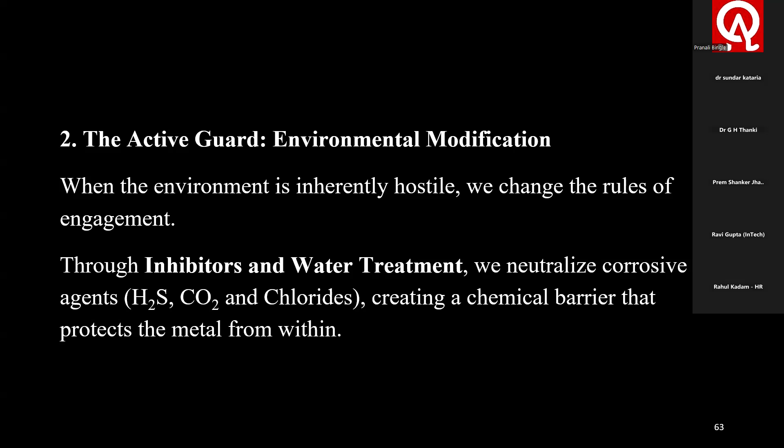Third is the external shield, surface protection. We leave nothing to chance. Coatings and cathodic protection provide the final layer of security, acting as a physical and electrochemical barrier against the relentless elements of the earth and sea.

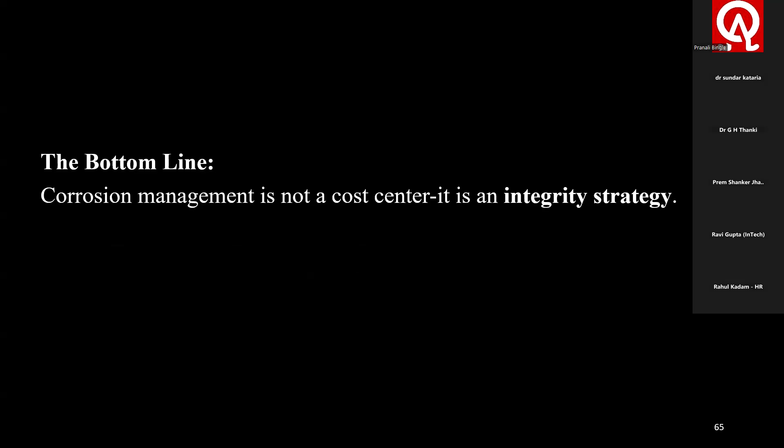So what is the bottom line? Corrosion management is not a cost center, it is an integrity strategy. People do not go for corrosion management, but it is an integrity strategy. By mastering the intersection of metallurgy and environmental science, we transform a critical threat into a managed variable, ensuring our infrastructure remains safe, sustainable, and profitable for decades to come.

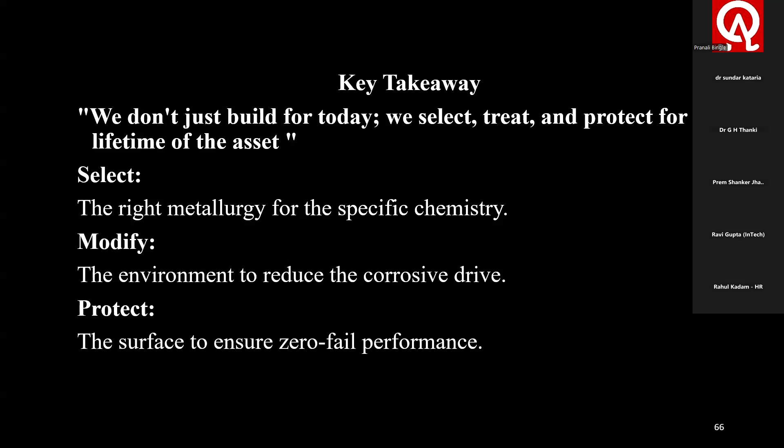So what are the key takeaways? We don't just build for today, we select, treat, and protect for the lifetime of the asset. Select the right metallurgy for the specific chemistry, modify the environment to reduce the corrosive drive, and protect the surface to ensure zero fail performance. Thank you for listening, sir.